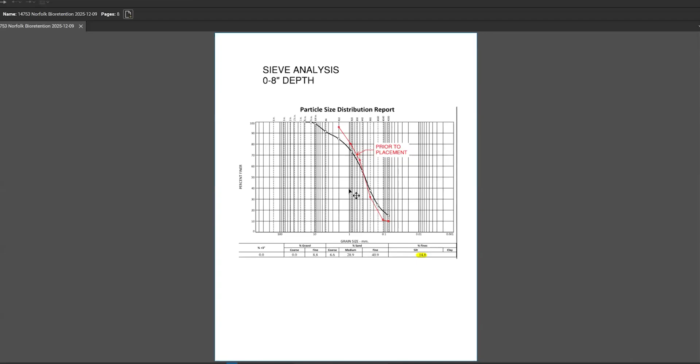Don, do you want me to share the options? I'm not seeing Don on the call, Marissa, but go ahead. I think you might have dropped. Oh, maybe he's here. Yep, there he is. Don, you're muted. Okay, go ahead. Thanks, Steve, for the summary. Apologies, I'm actually sitting in the car. No problem, please Marissa.

Just wanted to start with the rough overlay of the sieve analysis that was provided. The first sample was from 0 to 8 inches of depth. In red you can see that was the approved submittal, and in black is what the sample came back as. This area at the bottom of the curve is really where it's showing an increase in fines, so there's a lot more fines than there was in the specification and in the approved submittal.

The same thing for the 8 to 16-inch sample depth. Again, an increase in fines, as you can see at the bottom of the chart here.

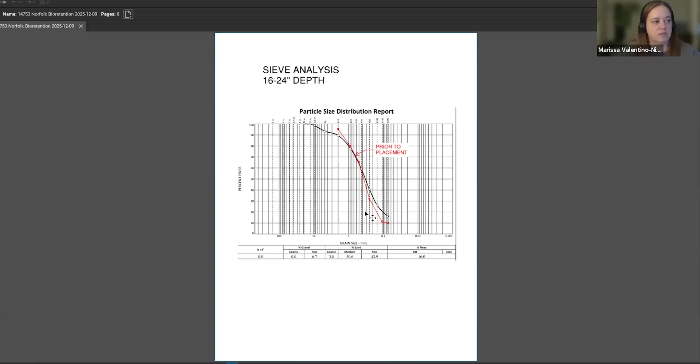Could you zoom in on those a bit more? Sure, they're a little difficult to read. Is that better? Much better. Okay, let me zoom in.

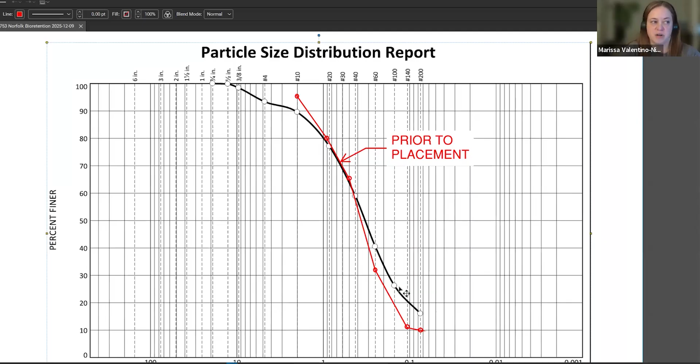This is the final sample that was done. As Steve mentioned, this had the greatest concentration of fines, which can happen as water moves down through the layers. Sometimes you'll see the greater concentration of fines at the bottom, between the two layers of materials, and it's significantly greater than the approved specification, which would cause a restrictive layer on top.

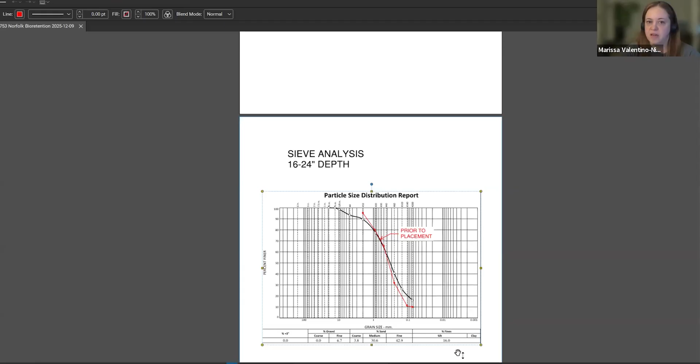And what do you mean by significant? Is there, like, 50% more fines? The approved specification had a maximum percentage of fines, I think it was 9.5%, and this 16 to 24-inch depth is 16% fines. We've seen that really anything over that 9 to 10% can clog it, so even a percent or two over that can cause a restrictive layer.

Is there any other questions on the sieve analysis, I guess, before I move to the options? Anyone from the committee?

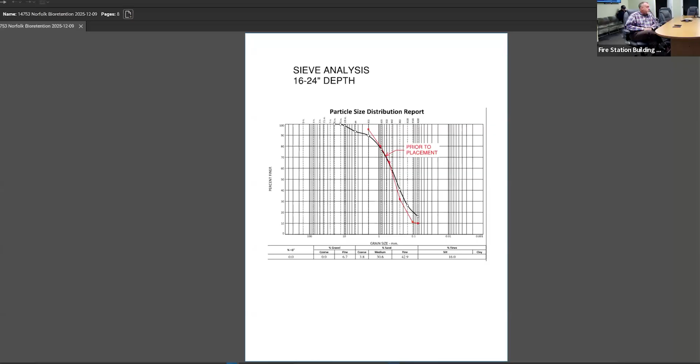I should have also introduced Rich McCarthy, town planner. So Rich, I know you're not part of the committee technically, but if you have questions, feel free to chime in. Thank you.

So based on these results, and looking at the test pits and the existing site and constraints, looking at options that could be done while keeping the fire station operational, we have 3 options. The first 2 are somewhat similar, and then the third one is a design modification.

So the first option is to augment the existing planting material. This would remove some of the bioretention planting material and add some sand in to really decrease the overall amount of fines. In addition to this, we would recommend adding a 6-inch perforated pipe in the pea stone layer. This would allow for an emergency overflow in higher storm events. The purpose of the system is still to function the same way, to allow water to infiltrate into the ground, but this 6-inch perforated pipe is just a relief in those larger storm events.

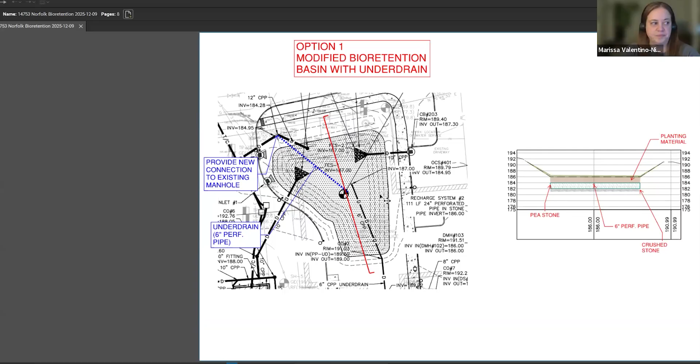The second option is very similar to the first one, but it also provides a 2 foot by 2 foot stone trench at the top. So when you were looking at the top of the basin, you would be seeing this stone trench. The stone trench would also have a pipe with an overflow. Since this is a lot higher, it could connect into that existing area drain. The planting material would need to be augmented, and some of the layers would need to be augmented as well. It would still function essentially the same way, but it would allow, in larger storm events and during the rainy season, for everything to really drain down.

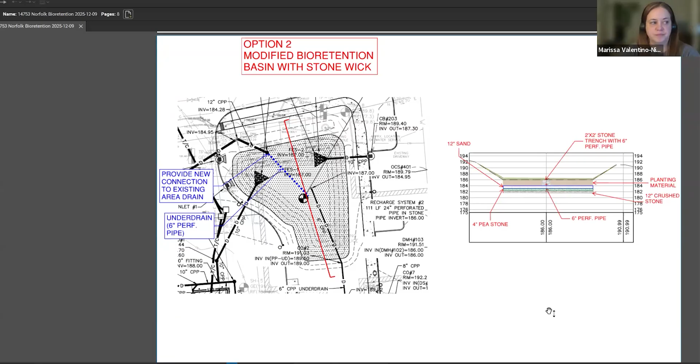Just to mention, both of these options would still be a depression in the front of the fire station. At the end of the slide, I have some options for cover as well.

Marissa, could I ask a quick question before you move on to option 3? Sure. Option 2, you have a perforated pipe within the 2x2 stone trench layer, correct? And that's connecting to the overflow? Correct, yeah, because that is at a higher elevation, it can connect to that existing dome structure located on the slope. But then you're showing a lower 6-inch perf—is that still going to the drain manhole? That is also going to connect to the area drain, but it's at a lower elevation. Okay, all right, great. Thank you. No problem.

So both of those options were modifications to the existing design, requiring all the planting and everything within the basin for it to function. The third option that we wanted to include is to...

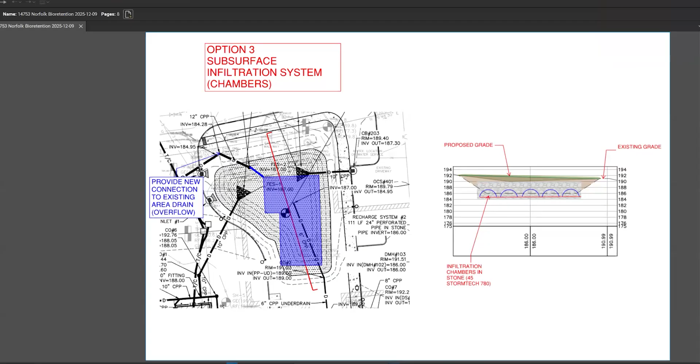Marissa, can you just mention the maintenance on each one of these? Yep, thank you, sure. Actually, that brings me to my next slide. There are a couple different options for surface for all three of these options.

What you're seeing in these pictures is more of a meadow mix. There are some woody plants. This can be left more natural. It doesn't require a lot of maintenance - you can really mow it once a year.

Another cover option, for option 1 and 2, is a grass mix similar to the other bioretention basin on site that could just be mowed when required, or when they're mowing the rest of the site. Really, once the plantings are established, they can be mowed however is fit.

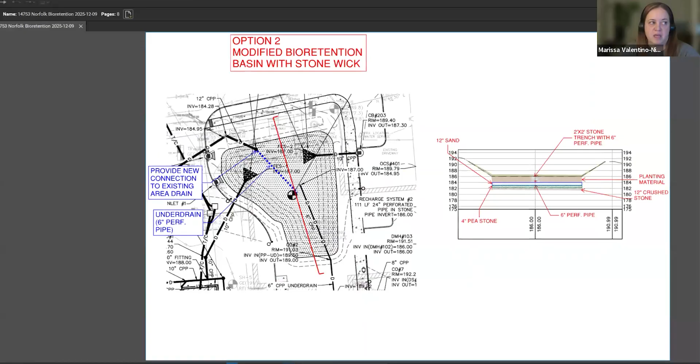Whenever DPW has availability or wants to. The third option, the chamber option, we're just showing grass on top of this, so this would be treated similar to a lawn. Chambers do require some inspection - there is another chamber system on site. Typically just inspecting them for sediment, since there is upstream treatment, so they are not intended to have any sediment in them, but if there was ever an issue, or a lot of sediment was viewed in them, it would need to be vacuumed out.

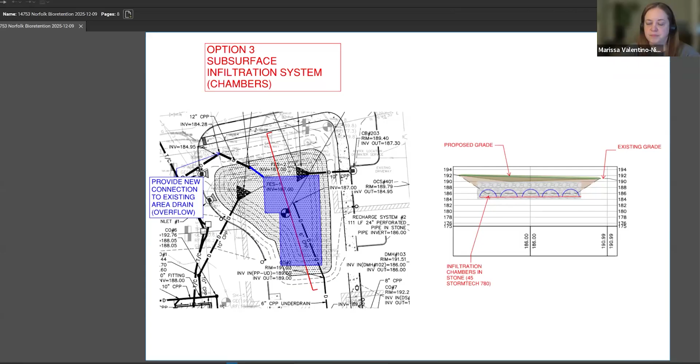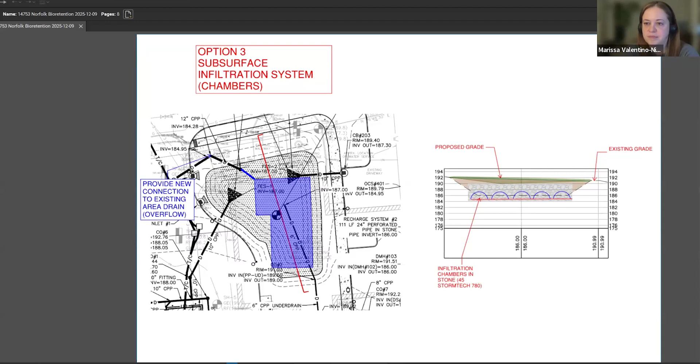We want to open it for questions and comments? Yes, sorry, I thought I heard somebody asking a question, but it was faint. So yes, at this time if anybody has any questions or comments, or would like me to talk further about any of the options, happy to. I'll open up to committee, or Rich, if you have any initial comments or things you want to discuss.

Yeah, okay, that's what you're here for. It kind of reminds me - and Aaron's on the call - of back when we were going through the whole permitting process with this basin option out front, in terms of how it would operate, how it would look, and so forth. And seeing what's out there and seeing some of the operation, I feel like the naturalized option that you're talking about is out of place with this application.

Hence, back when not all the members agreed on the planning board, having what you showed in the third option was really what they would have rather seen here in the first place, not what's out there today, because of the overall aesthetic of the fire station and so forth, not placing this right in front of that building. And naturalized - while I get it, and I support those kind of applications.

But they're also much higher up too, not as deep, those other basins over there, right? So these test pits were dug to 2 feet below the elevation of this bioretention. And the other ones that are functioning are similar - same depth, same section.

The only difference was that one has grass on top versus that naturalized material. This one was specified to have a naturalized material. As long as it's established, it doesn't make a big difference in the type of material on top.

I mean, sequencing and means and methods is the contractor's responsibility, right? Yes.

So what's the recommendation of the design team? Well, we're suggesting there are a few options. The first is just to fix the problem and move along. The next option would be to fix the problem and add a perforated pipe at a certain level. The second one is basically a drainage channel at a different level, which allows for potential overflow to go someplace.

And then lastly, and the reason we showed this was because of what Rich has been saying, is that maybe we don't even want this out front, even with the vegetation that's supposed to grow in there, to bring everything up to a level that can just be mowed.

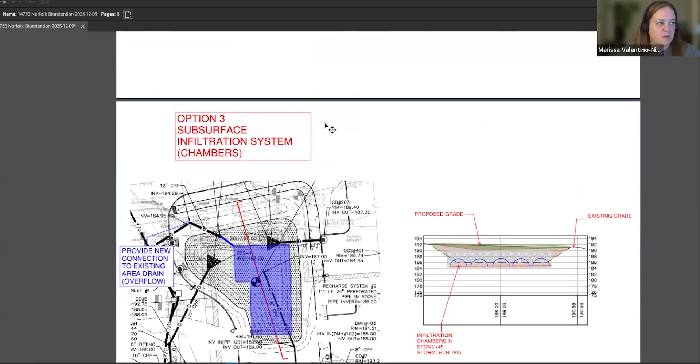Got it. You agree, Marissa? Yeah, so option 3 is fully subsurface. I'm going to share my screen again. Sorry, I'm not sure why this isn't zooming in. So you can kind of see it brings up that surface grade, so it removes the side slopes that could enter the basin, and everything's below surface in stone wrapped in filter fabric. So it is receiving pre-treatment prior to entering here, so there shouldn't be any sediment in this system.

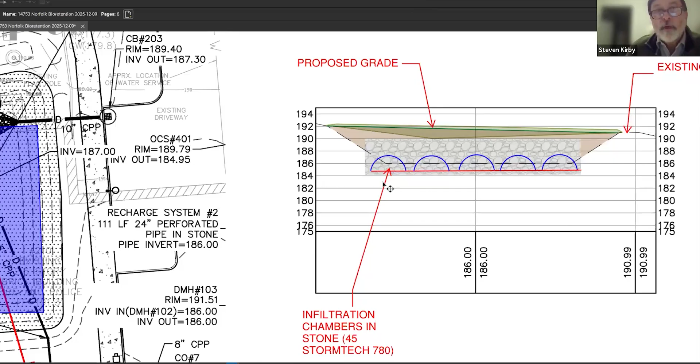And Marissa, the drainage piping that's entering into the basin where the flare ends are now, that would connect into that stone layer or directly into one of the chambers itself, like an end, a closed-in end, so everything goes directly into the chamber voids. Yep, so it would connect directly into a chamber. We would recommend they wrap one of the chambers, a row separately in filter fabric, so it adds just like an additional treatment. So there might need to be a little bit of modification to this pipe, but these would connect directly into the chamber system, same thing with these structures.

Would probably have a low point and then have an area drain collect it and pipe it, connecting directly into the chambers. Because that's just a surface treatment and surface drainage at this point. So we'd have to bring it underground, so there would be some additional pipe connections, but it wouldn't be connecting or filtering from the top. It would be connecting directly to the chambers.

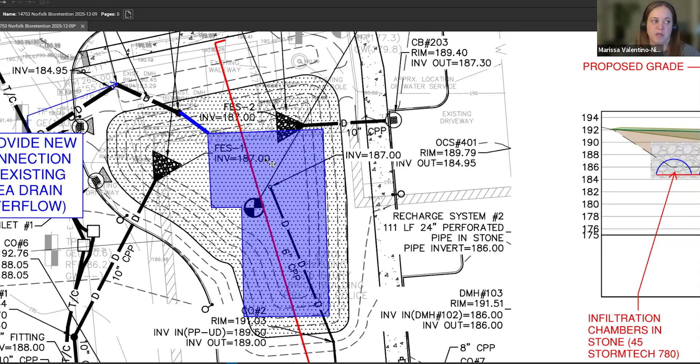Are there any other restrictions on building this? I assume the ground can't be frozen when you're doing it. I guess, to Aaron's point, what is stopping us from doing it? If the contractor comes back and says it's probably about 50, 60 grand and we'll eat half of it, what is stopping us from doing this from an environmental perspective, from a planning board perspective? What are the potential hurdles we have to get over to do it?

Well, when we talked with Rich yesterday, it would have to go in front of the board for any one of these three options, at least for an administrative approval. And you also wanted to go through Beta to have their eyes on it. Yes, but we could have Beta look at it before it gets to the board. The next meeting is January 13th.

So potentially you're in front of the board January 13th, and they say yes. I guess, could you start the next day, or do you need to be building this when the temperature is 30 degrees?